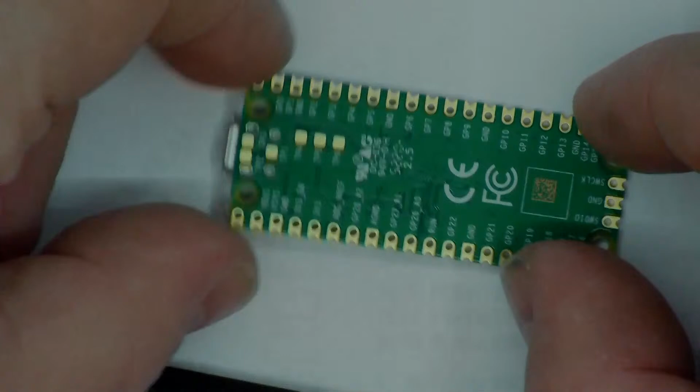Anyhow, we're going to go over the Raspberry Pi Pico today. Let me get that on an overhead cam for you. It's this little guy right here, and our job is to come up with a matching land pattern that will intercept all of these pads so that when we secure it down to our board, we've got something to solder it to, right?

That's what we're doing. Your part editor is going to be responsible for your pads, for your silk screen, for some invisible layers, and we should probably start with those. So let's go to a picture-in-picture view. All right, now I just have to stay on screen. So the first thing that we probably want to talk about, and I can just zoom out, let's do that, is what these various layers are.

One layer is quite obviously the copper. Some parts, especially through-hole parts, actually pass through your board. So you'll have another layer on the bottom. And each of these are copper layers. Everything that exists on top also exists on bottom, right? So I'm not going to draw all of the layers below, but the exact same thing happening on top of the board happens on the bottom of the board. It just passes through the mid layer.

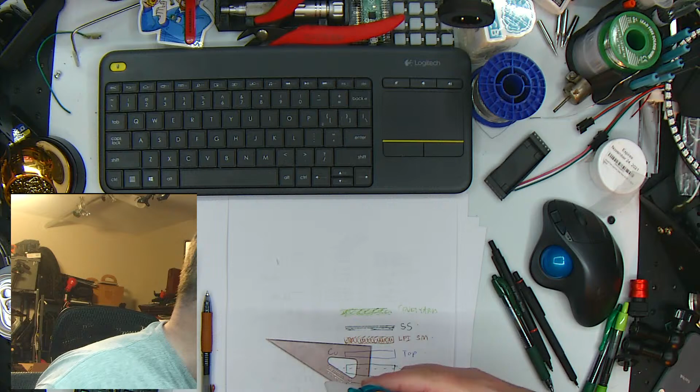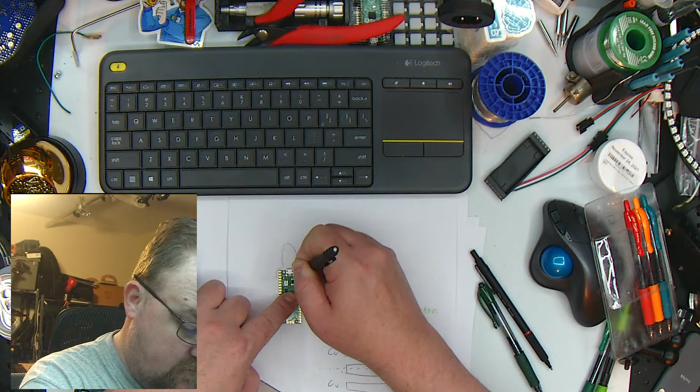When you have a part, for example, that Pico that I've already seemed to have lost. Wow, that was actually really impressive time-wise for me, to lose something that quick. Well, if you've got the Pico, you don't want to put other parts too near it. So the courtyard is just a contour that goes around your part so that you don't put other parts too close to it. So it's just a contour.

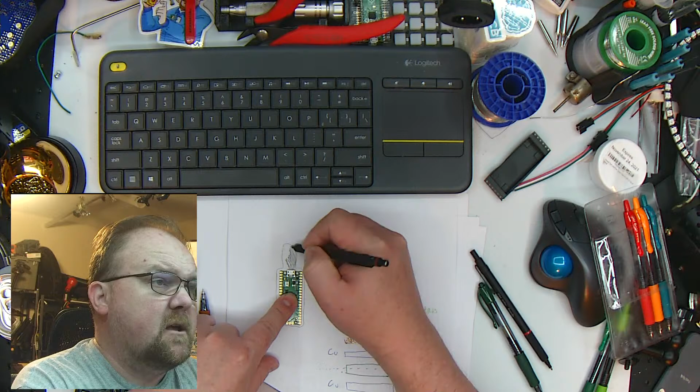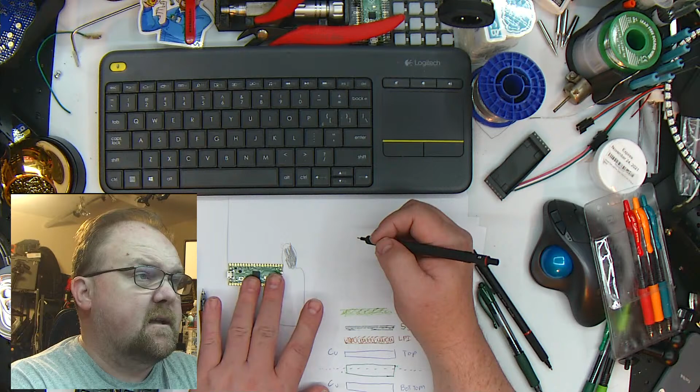And you'll notice I did a big area out here. You're going to need to be able to plug this thing in. And cables usually aren't all that bendy. So you need an area out in front. You might even need to put this thing at the edge of the board so that you can plug into it that way, because it's going to sit really close to the edge. Anyhow, that's your courtyard layer. Then on top of that, you've got an assembly layer.

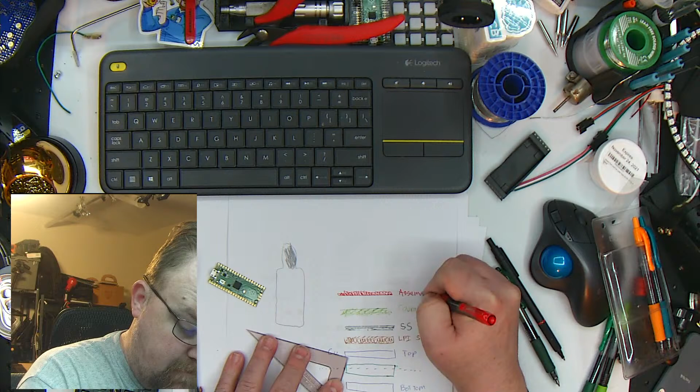Your assembly layer is going to be used by the fab house for the pick and place, for locating the center of the part, the centroid or the number 1 pin, depending, and helping to pick stuff up and place it where it needs to go. There's a few others too, and in fact I can bring them up for you.

I think I'm on screen almost. Oh yeah, I just need to change this. Give me a second here. And let's bring up DipTrace. There we go. Wrong screen. No! Yeah, that's going to make it mad. Let me close these. Sorry. I thought I had it ready to go, but when you're working off multiple screens, sometimes things just don't work the way you want them to. No, I don't want it on that screen. Yeah. Not ideal. DipTrace doesn't like moving from 4K to 1080p. Come on. There we go. No, come on. There we go. And it messes up this toolbar, which kind of makes it hard to see things.

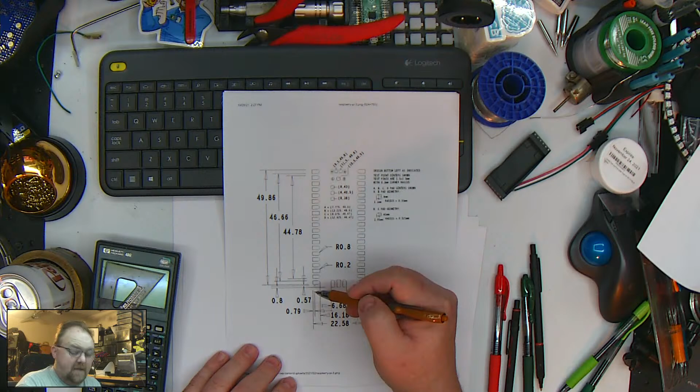46.66 is from the inside of the top pad to the inside of the bottom pad. So if we subtract those two numbers, what we'll have is the height of two pads. The probably best way to illustrate that, right when we subtract them, we're going to get the height of two pads. 46.66 to 44.78. So that's from the inside of pad 1 to the inside of pad 20. 44.78 is from the outside of pad 2 to the outside of pad 19. Clear as mud, isn't it? So that will give me the spacing between two pads.

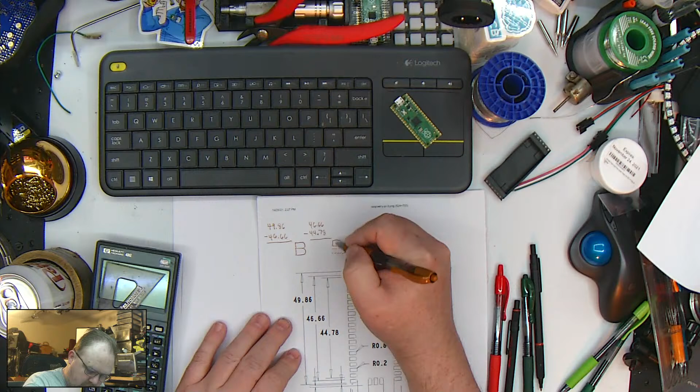All right, we're going to run those, even though we can very clearly do those in our head. 3.2 isn't hard to come up with. We're going to run them through the calculator just to make sure that we don't do something stupid in the subtraction process. So we've got 3.2 divided by 2. So I've got 1.6 for the width of one of these pads. As far as going on the other side, we're going to do the same thing.

46.66, 44.78, subtract them, divide by 2, and, oh, I guess I should write it down first, 1.88, divide by 2, so what we've got is a single pad plus the space to the next pad is 1.6 plus 0.94. So the distance that we need to go from pad to pad, the interpad distance then is 2.54 millimeters.

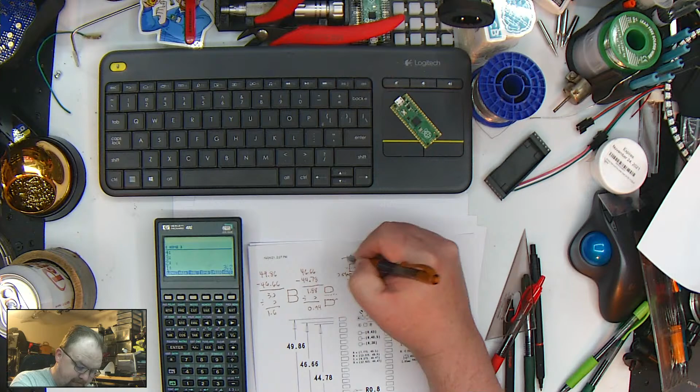Now, next up, we've got to figure out the width of these things. And for those, I need the 22.58 and the 16.18 measurements that are down at the bottom here. 22.58, 16.18. Subtract them, divide by 2, and we get a pad is 3.2 from end to end. All right, we are ready to type some things into our calculators there.

My standard pad is going to be D-shaped. It's got a width of, what did we say, 1.6. A height, or I'm sorry, let's do a width of 3.2, 1.6. And let's just kind of see what that ends up looking like. If we got it right, nope, I got it backwards. So let's back that off. I figured I did. I wasn't quite sure. Let's see what that looks like. That looks like the pad I was expecting.

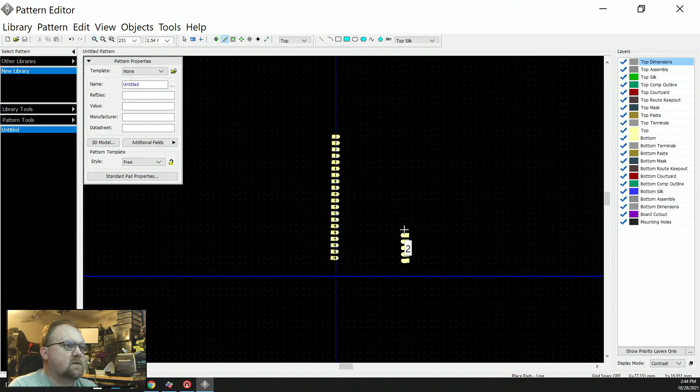Okay. Now, we're going to go and make an array of pads down one side and then up the other, and then we're going to set the spacing for them. That's great, except are there 20? I better double check. 3, 4. There are, in fact, 20. So down one side, up the other. Oh, I don't know if they're straight. They sure don't look straight.

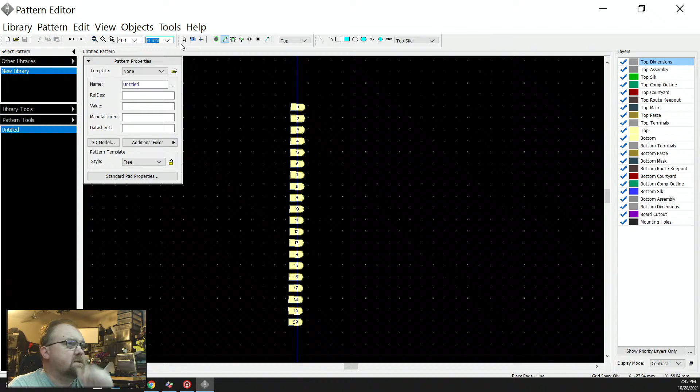Let's make sure we've got a grid snap on. That's what's wrong. So I'm going to snap to grid, and I've got my grid set at 2.54 millimeters. So these things are going to all pop out at 2.54 millimeters spacing distance, which is what we want. And then I will fix my origin and all of that in a minute. I just want to get these things down.

1, 2, 3, 4, 5, 6, 7, 8, 9, 10 through 20, 21 through 40. I'm not doing that arbitrarily. I am doing that based on the datasheet, the Pico module. So if we scroll down to, looks like I might have already made comments on it. Let's come back here. If it'll let me, will it? It won't. Okay.

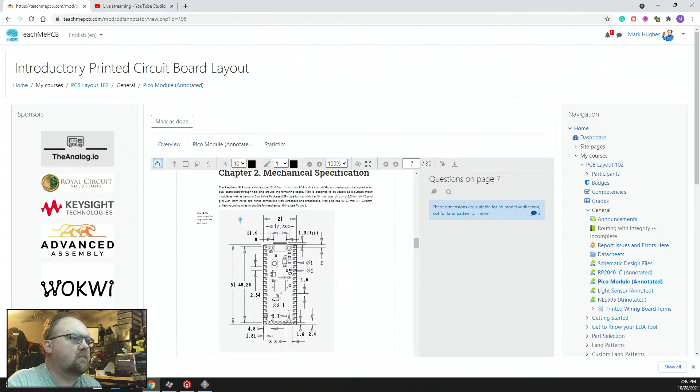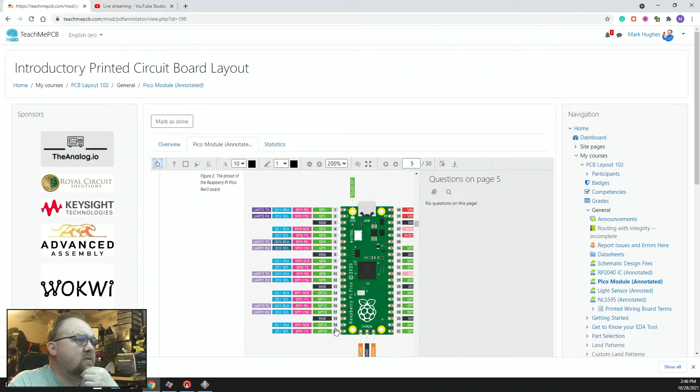I can't tell yet if those are, well, that gives it to us anyway. I just need to zoom in some more. Or maybe that's my max zoom. Okay, so it goes 1 through 20 down the bottom, 21 through 40 up the side. That is indeed what we want.

Now, spacing. If I go back to the image here, I either need 16.18 from inside to inside or 22.58 from outside to outside. So I'm going to pull up a dimension tool and capture inside to inside. Whoops. Okay, I need that to be 16.18. Right now it's 14.58.

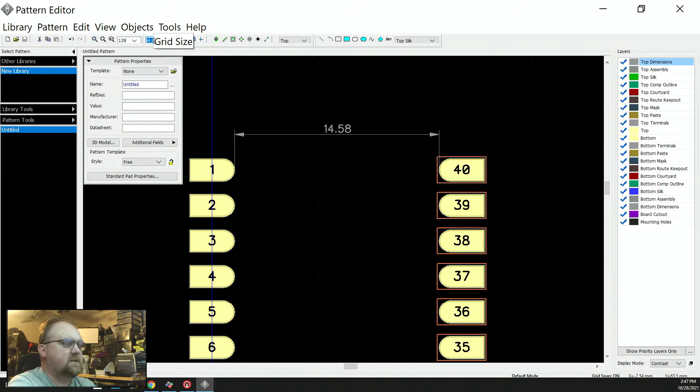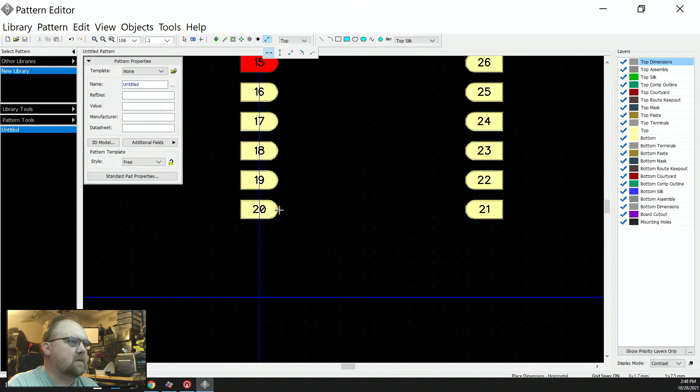And I don't have it. What I'm going to do then is set my grid nudge to 0.1. Grab all of those. Whoops, 16.18. So now these things are exactly where they need to be, right? I do want that dimension, but I'm going to move it down here where it's a little closer to what it looks like in the data sheet.

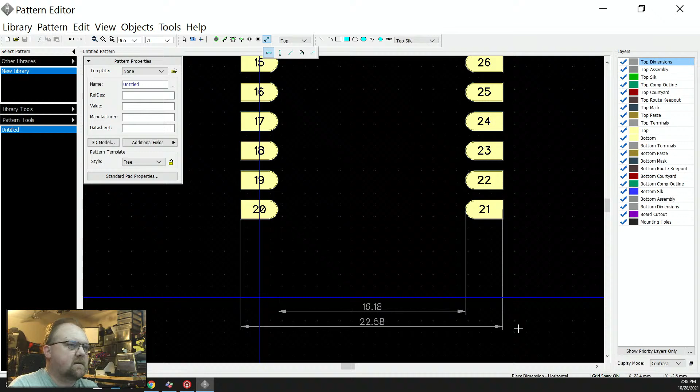Okay, and then 22.58. Whoop. Highlight, select. Okay, those are done. And while I'm at it, I'm going to add a couple vertical dimensions just to make sure that I got everything here correct. I can't tell if that's letting me highlight it or not. No, that's off. Will it let me do it? I thought DipTrace would do it.

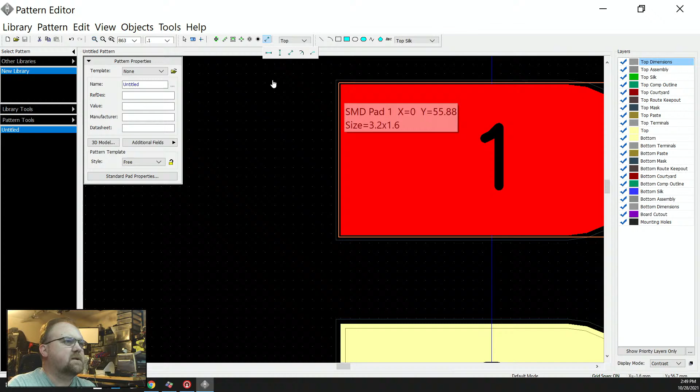Well, let's just try it. But I'm pretty sure it's grabbing grid coordinates instead of the part coordinates. Let's see what number we get. 49.9. It's supposed to be 49.86. How else can we do this? View. Well, tell you what, let's not worry about it right now. But I would like to come back in and add those additional dimensions just so that we can keep track of anything.

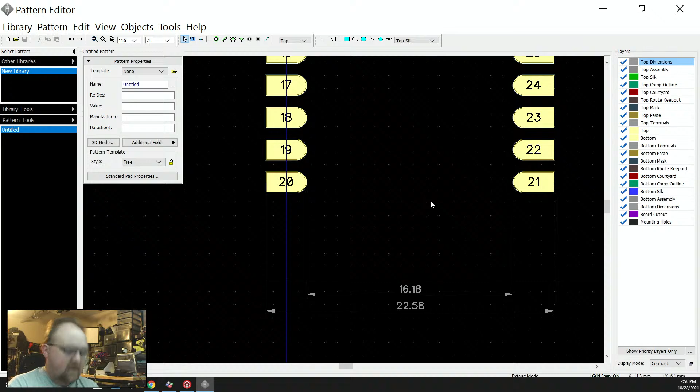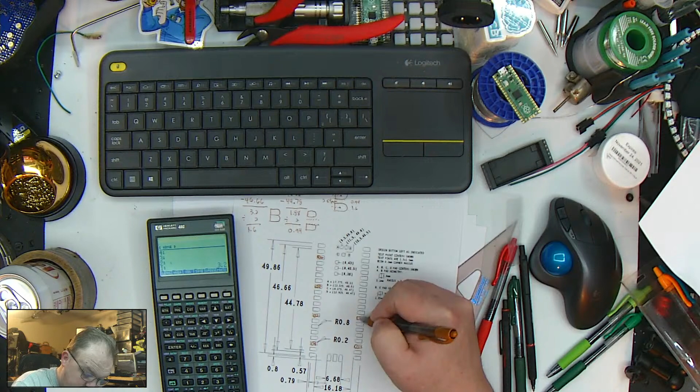Next, I've got to edit these radii. If we go back to the data sheet, ground, ground, ground, ground. Mirror image on the other side. So those are different pads. I'm going to go back and edit those to reflect that. And the way that I do that in DipTrace is I no longer use the standard pad properties. I'm going to do a rectangle with a rollover of 0.2.

I can't read that. I think that says 0.2. It's just mad because of what I did. Now the next question is, can I do multiple pads at once? Let's find out. We're going to turn that off. We're going to turn these to rectangle, and 12.5 gives me the specified rollover. Oh, I can. Okay. So then let's just grab the rest of them.

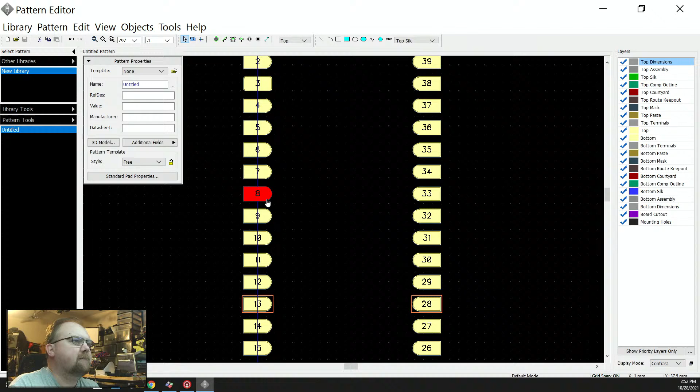I need 4, 5, 6, 7. I need pads 8, 9, 10, 11, 13, 18, 20, 23, 28, 33, 38. So grab 13 and 28, 8 and 33, and 38 is left to do. Width, height, all of that business, 12.5. Okay. We're looking good so far.

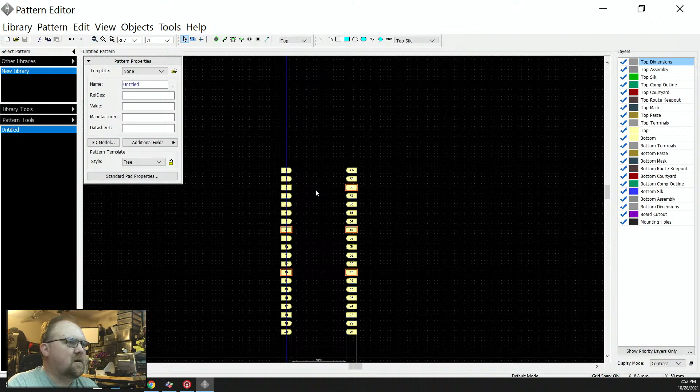So now the question is, what are we going to save this as? This is my library. This is going to be the Pico module. It'll be fine in there like that. We still have to get the pads up in here and the 3 pads down here. I'm going to do the lower ones first, despite the fact that I'm sure they're going to anger me. So these are going to be pads 41 through 43, and this is silly. So probably need to get in even closer for you.

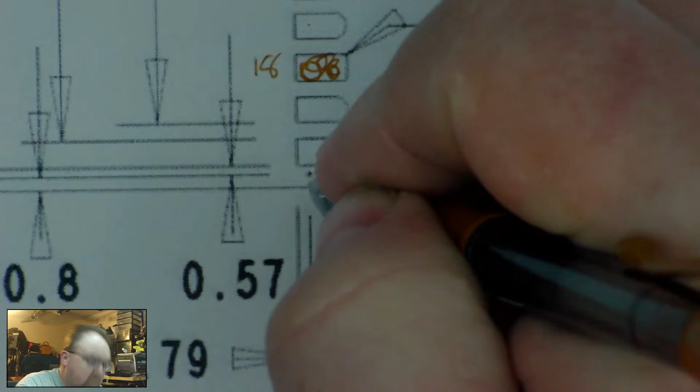So they've created a datum, a little point right there that things are measured against. From pad number 20, the bottom of pad number 20, that datum is 0.57 below that. And below that datum, another 0.8 is the bottom of these pads. So 0.8 plus 0.57, so we've got 1.37 is the bottom of this pad below the bottom of this pad.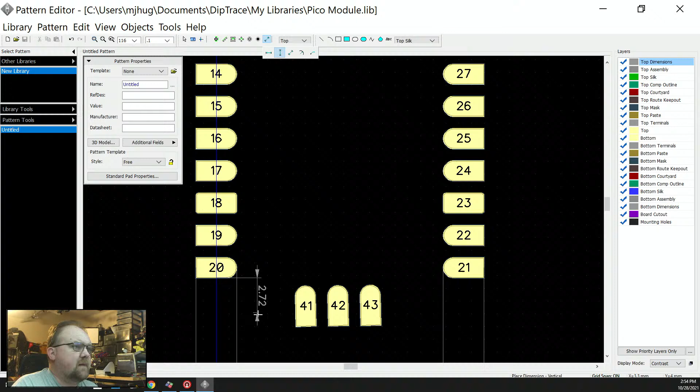Raspberry Pi Foundation, if you're watching, I don't like the way you did this data sheet. So we need to grab that. And we need to grab that. Oh, did it? And we are going to have to move these things so that they are 1.37.

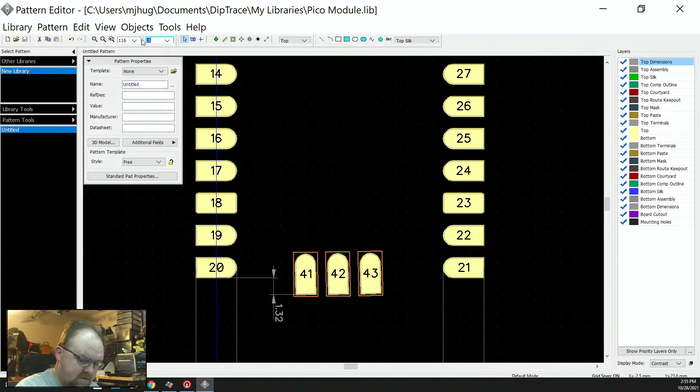Now my spacing isn't sufficient, so I'm going to drop that even more. Whoops. No, 0.05. Enter. Grab those three and move them down to there. All right, that gets me that.

But now I need these things to be 6.68 apart. I bet you they are already there, but we're going to measure them to find out. They sure are. And then 16.18 center to center. That does me no good. Oh, I already know that.

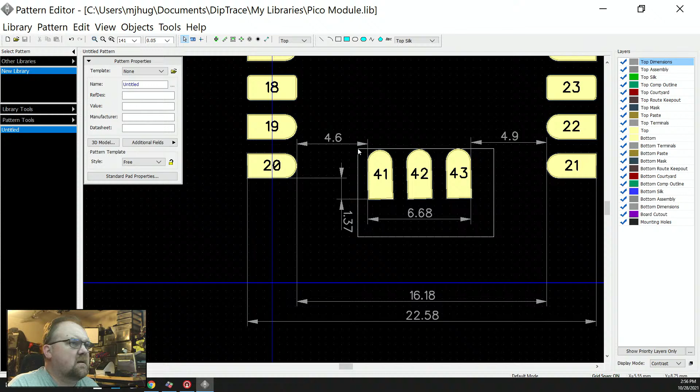I need these things to be centered with respect to each other here. Okay, so those are not centered. So we're going to grab those and they are now centered. All right.

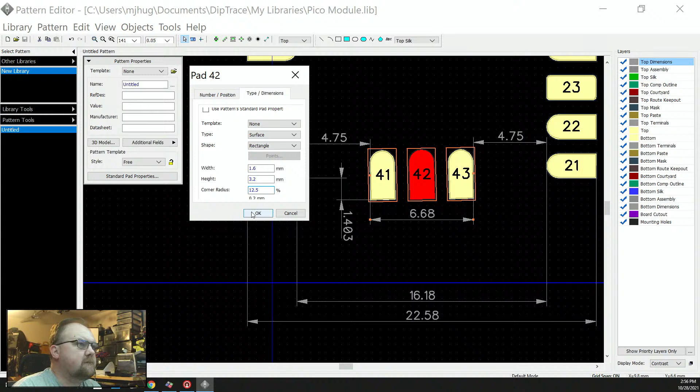This is one of my magic pads again. So give me a rectangle with 12.5 rollover. No. I had them all selected. My bad. Give me a rectangle with 12.5. Okay, now we're starting to look like something useful. Not a ginormous fan of the data sheet, but at least we are making forward progress.

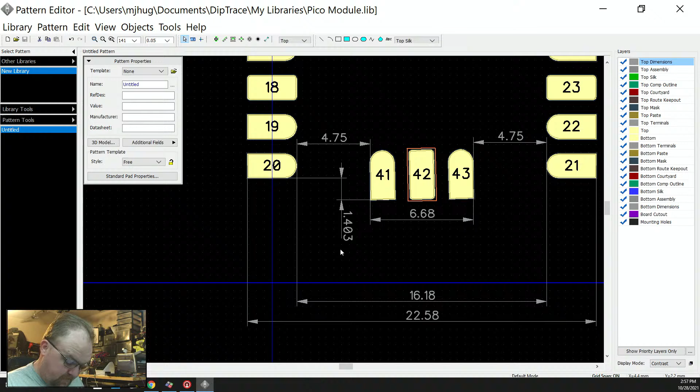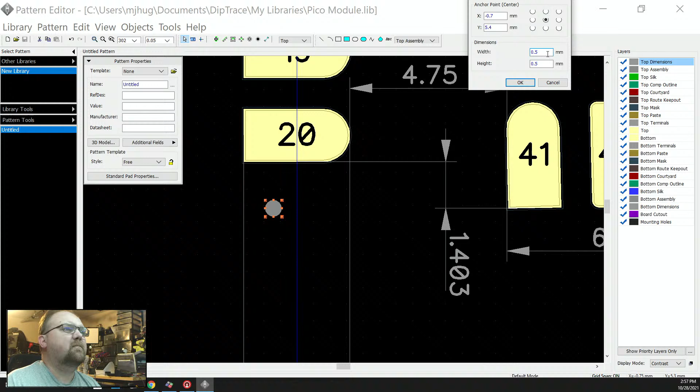Now, they created a datum right there. Let's put in a filled obround on the assembly, and then we'll locate it manually here in just a second and move our origin there. Yeah, I don't care about that. And we'll just make it 0.5 by 0.5. Yeah, that's fine. What matters is where it's located with respect to the left of that pad and to the bottom of that pad.

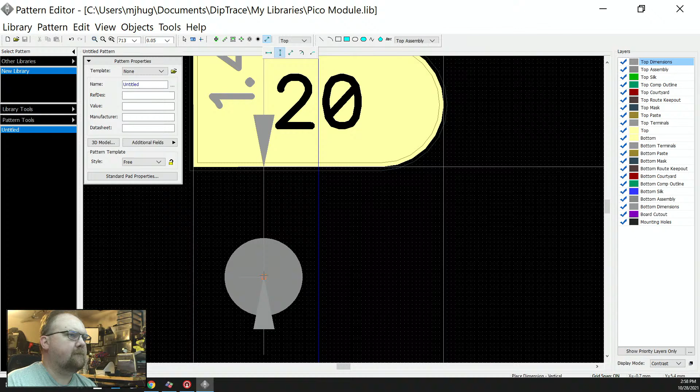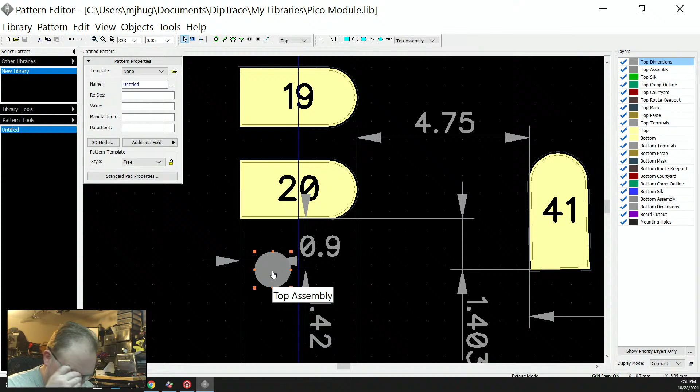I need the center of that. Is it not going to let me? There it goes. And then I need another from there to the center. Okay. We've got something. According to the data sheet, it needs to be 0.79 from the left edge. That's close, but not close enough. We'll get that in a second. And it needs to be 0.57 down.

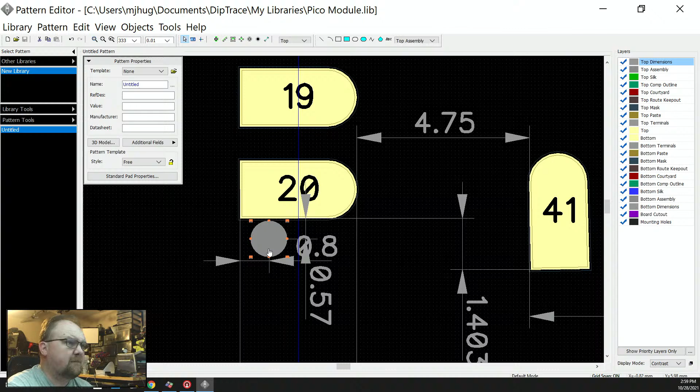So we're going to drop this down to 0.01. Give me a smaller nudge. There we go. So this is going to become the new 0, 0 on my design. Why that's the 0, 0, I couldn't tell you. But from that datum, they've laid out these last 3 pads. And these last 3 are the USB D+, D-, and ground.

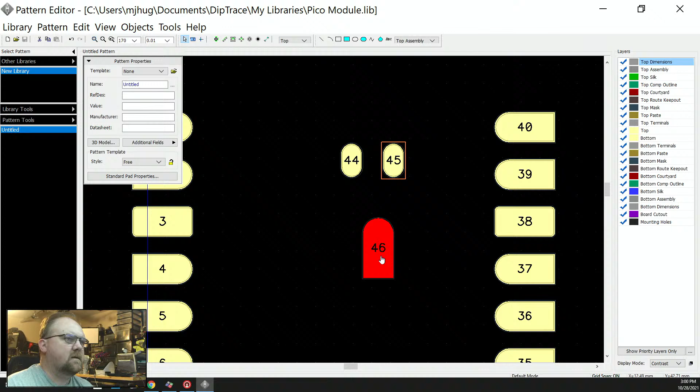They are not going to be that size. So the first thing, well, here, let me just turn off the, there we go, just so I can edit those without screwing up everything. And it gives in the dimensions that the top two are 1.8 tall and 1.1 wide. And they are obrounds. Well, except it needs to go the other way. And then it says radius of 0.55.

Let's get them both at once. Yeah, it looks pretty much the same to me, but whatever. And then finally, 1.45 by 1.05. Why they're so different, I couldn't tell you. And radius 0.525. Oh, but that's not a percentage, is it? Whoops. There we go.

Now, as far as location goes, the datasheet is actually kind enough to locate these for us. So the 9.5, 49.8, 11.5, 49.8, and 10.5, 46.5, we're just going to put those right in because they're referenced from that datum that we created a little bit ago. So I just go over and start typing in. 9.5, 49.8. 11.5, 49.8. And finally, 10.5, 46.5.

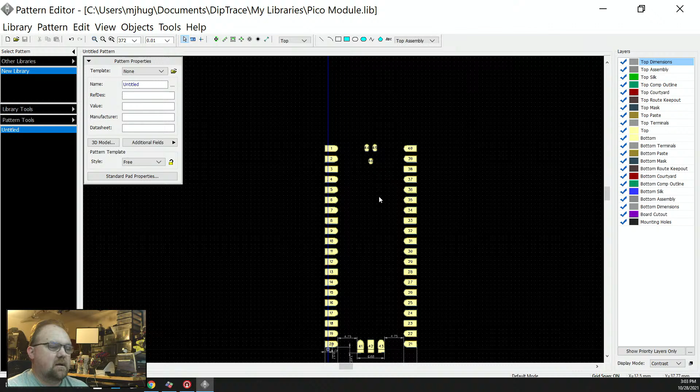Okay, those are located. There's only one issue. This is the surface mount design. If you guys were going to put this down in a reflow oven, this is just fine. But if you're not using a reflow oven, you need a way to get in there and apply solder and heat those spots. That's tough to do. So instead of leaving those the way they are, I'm actually going to change those from what's recommended and make those through-hole parts. They can be obround, I don't really care. But what we need to do is put a hole in the middle.

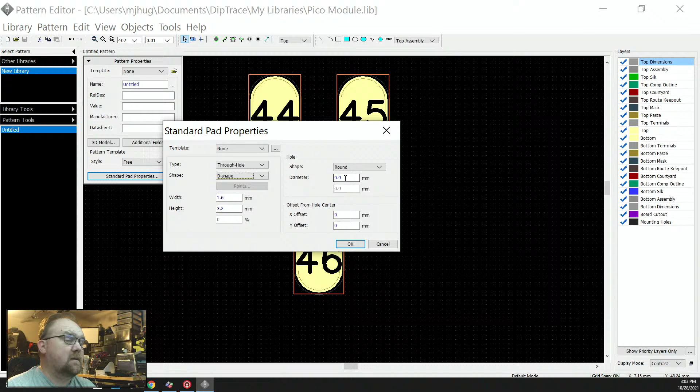Through-hole part, yeah, let's just see what that looks like. There we go. So now we've got some holes in the middle. The only thing is that these things don't have very large annular rings. The copper around the edges there isn't that big, and that can cause some errors. So what we're going to do here is grab those, and see if we can shrink those holes. Those are pretty big diameter holes. I could take those down to 20s. So if we do 20, let's call that 60 and 60. Let's see what that looks like.

And we need to know the spacing between those two and make sure that is not going to throw an error. So I've got 20 mils between them. That should theoretically work. It's not going to be the prettiest joint ever, but it'll hold. There's space in the middle, there's an annular ring that's big enough. The space between them is big enough. So that should theoretically work.

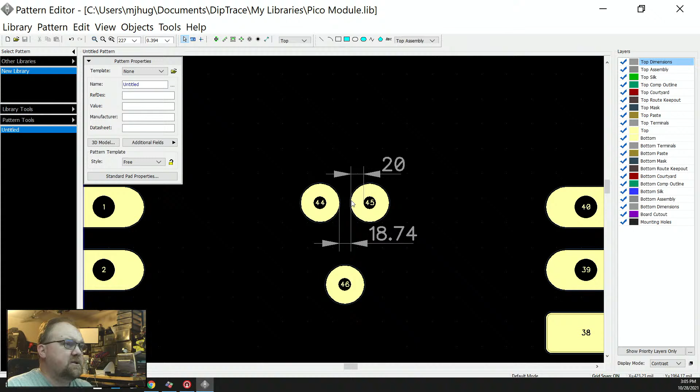I'll leave those off. Now, we're not done. Let's go to a reasonable... yeah, 25 mils should be fine. A reasonable grid size, and let's put out our courtyard. This is going to be our keep out area.

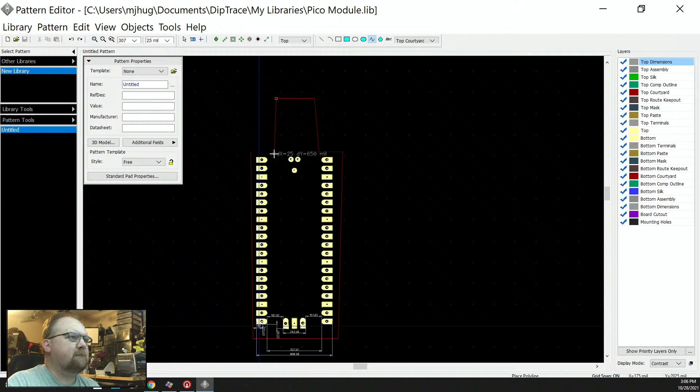And these can be relocated after. You can move them around a little. I just kind of want to get the basic idea down. I want to give a decent space around the top there. Whoops, haha. What can I say?

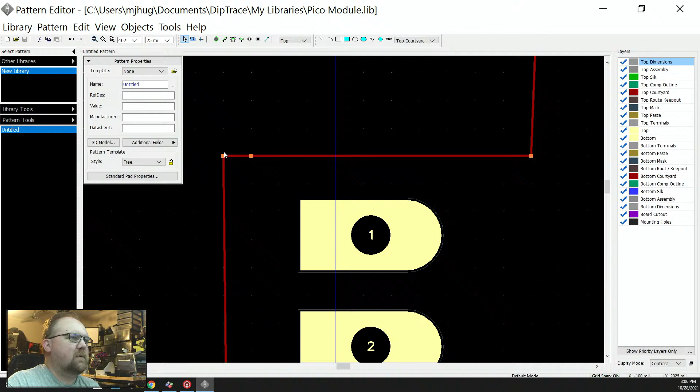So just bring that one down. I couldn't bring the other one up, and then that side's too high too, and it's at an angle, and blah blah blah. But all of that is adjustable.

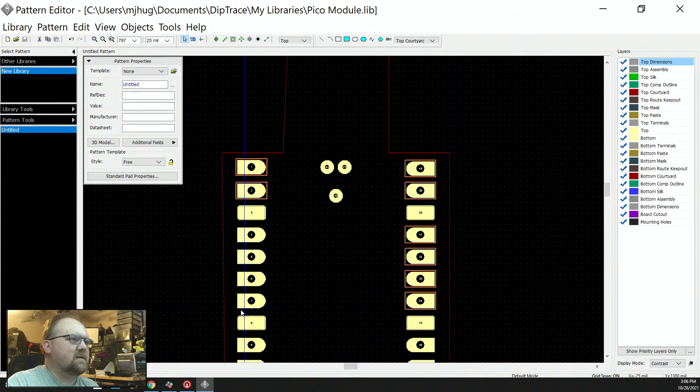Oh, and if you look, I messed up these. I turned them all into vias when I was playing around with the others. So I've got to click on all of these and make them surface mount again. Whoops. I tell you, I just can't have nice things, can I? Keep breaking them.

It's the only problem with using standard pad properties in DipTrace, is it's very easy to mess things up when you don't mean to. Surface D-shape. There we go. That fixes it. Okay.

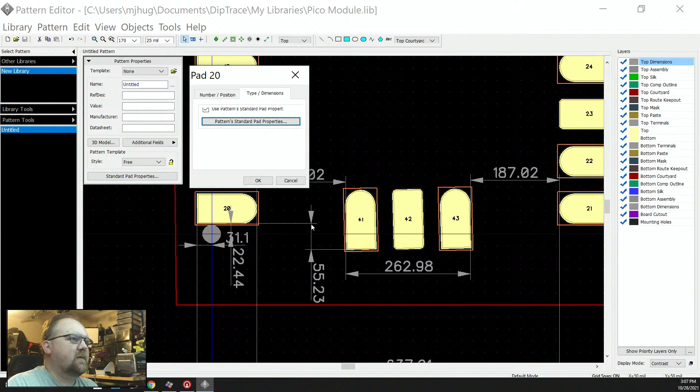Now, you also should get in the habit of putting a pin 1 indicator. And that can be a circle or a triangle. So I'm going to put one in my assembly layer. That won't show up on your board at all. And then I'm also going to put one on my silk. That will show up on your board. It's right now hiding underneath the assembly layer, but it's there.

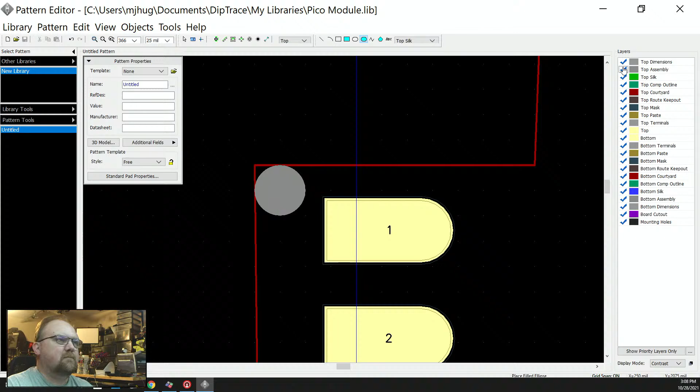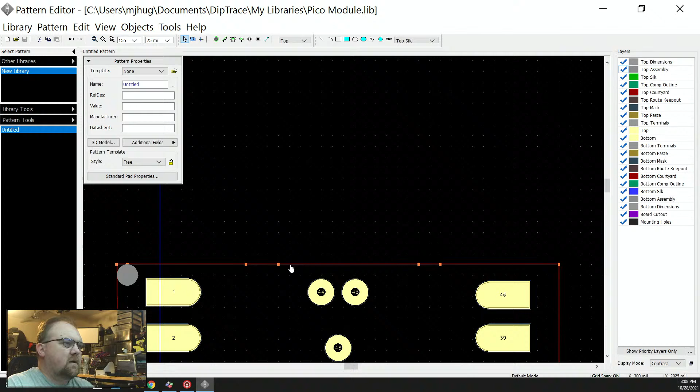Right? And then you can add other information if you want. You don't have to, but you certainly can. One thing you might consider doing is, instead of doing this big offset thing that I did here, you could indicate that this needs to be placed next to the board edge. I'm going to delete points here.

Just because anywhere you put it on the board, it is going to end up really close to the board. That could be problematic later on if your off-board USB doesn't work. So I'm just going to get that party started. And then we will label that board edge.

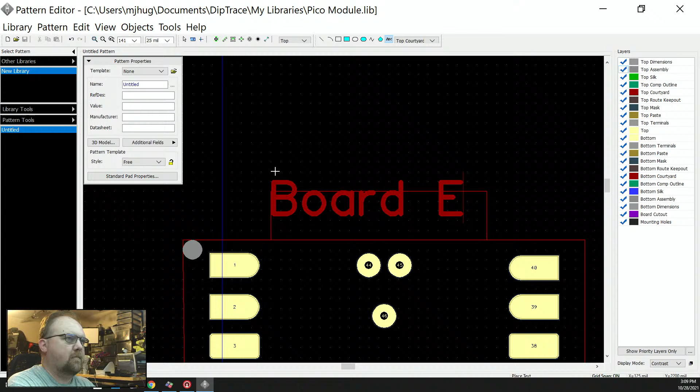No, come on. Don't be that way. What's going on, DipTrace? There we go. It took it that time. Yeah.

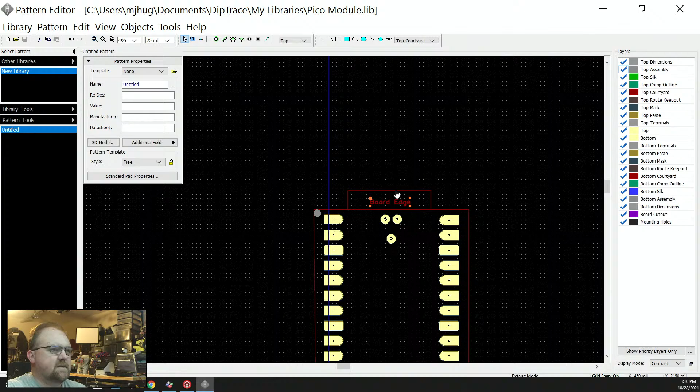Courtyard, anchor point, font settings. This will never print, so I can go to any size and it'll be fine. But this reminds me that when I place this, that needs to go towards the board edge so I can always plug in my USB.

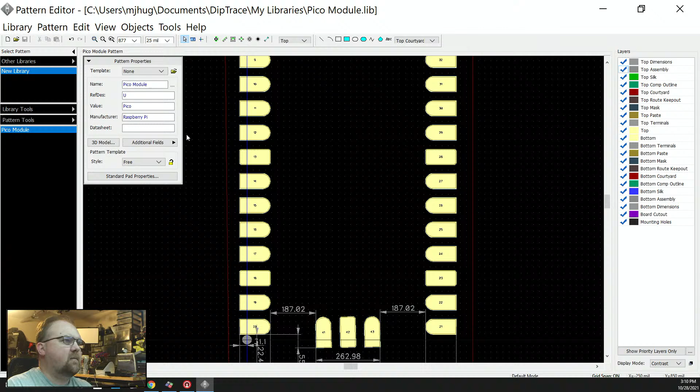All right, so let's save that as the Pico. Module ref des is going to be U whatever. Okay, and then we can save that. Now, we're not done. We need a 3D model. Oh no, don't be this way. It's going to be completely off screen. Am I not going to be able to show you how to add that?

Oh, come on. Oh no. Okay, let me bring this down to the other window and see if I can get that opened up and then move it back. I don't know if I can. It is off screen on this one too. Well, foo! Okay. Do I have any other tricks up my sleeve? Can I edit 3D model from here? Nope, still off screen. Well, phooey phooey. Yeah, it's way off screen.

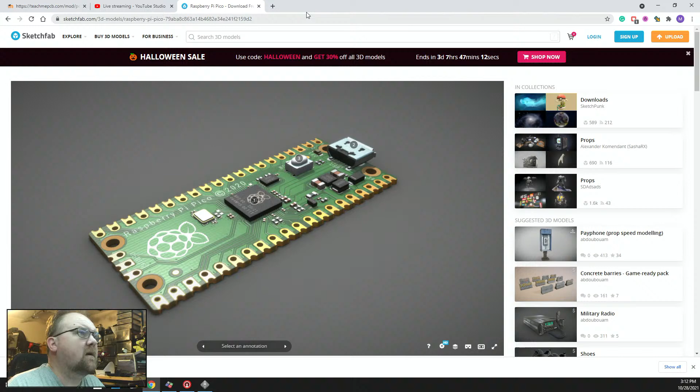Let's try that. Select an annotation. How about save? Is save an annotation? There's also one, the Raspberry Pi Foundation has one too. So there's no need to pay for any of this.

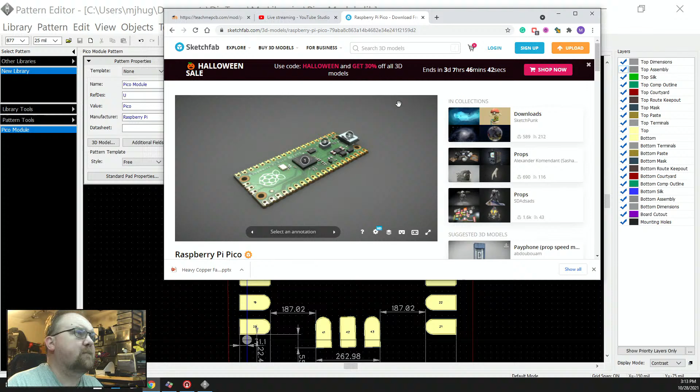I just don't see a download. Maybe I have to log in or something. But anyways, there's plenty of versions of this thing around, and you can actually take them and import them into your 3D program or into your EDA program and compare, which I can't do because all of the important buttons are way off screen, but you can actually compare the pattern that you just made to the 3D model and see if everything lines up. If it does, you're golden, you're good to go. If it doesn't, you have to figure out, is the 3D model bad or is what you did bad?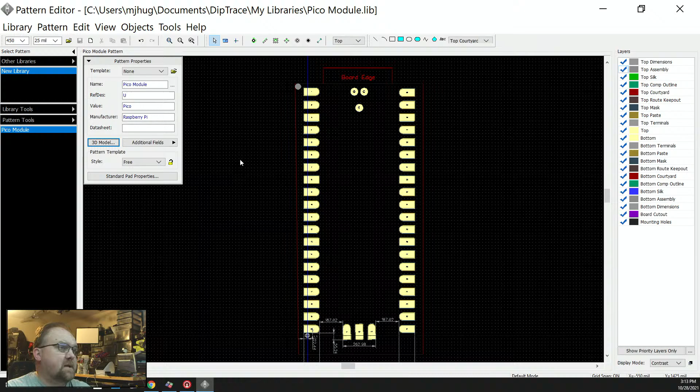So anyhow, that was unpleasant. I don't know. Let me turn off my picture-in-picture here.

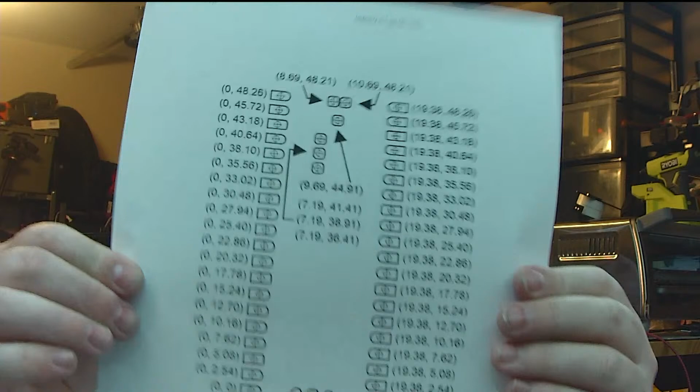Now, what I did do for you, because I am not a big fan of this, right? That does not spark joy. So I went through and I indexed everything off the pin number 20 there so that you can have a little bit of a better time figuring out where parts are. And that will be part of the resources that are available to you when you lay out your patterns next week.

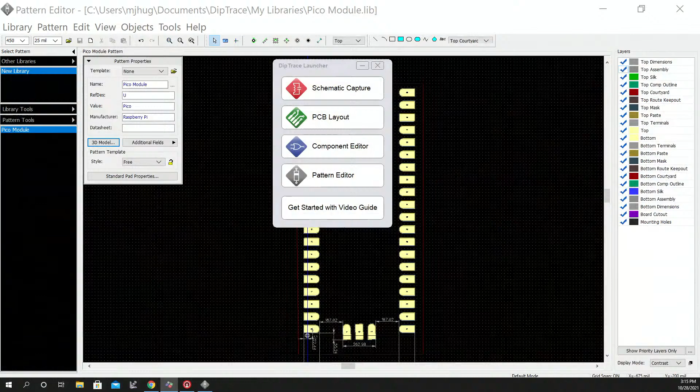Now, that's not the only thing you have to do. If you did that for every part that you have, it would be a long week. Personally, that is what I do. I've been burned far too many times importing other people's models. But it is possible to grab those things from places like SnapEDA. So let me take a quick moment and show you how to do that. Hopefully it'll be on screen.

No, it's off screen. Don't be that way. The only other thing we can do is I wonder if we can close it and reopen it. In the wrong screen. I wonder if we can project. I wonder if I just change the resolution. Yeah, duplicate. I want it to be duplicated. But it's not duplicated, it's extended. Something's wrong. Oh, this is frustrating. What else can I do? Oh, here we go. All right. So, it's not ideal, but I can kind of make it work.

So you type in the part that you're looking for. You do have to create an account, which I'm not going to do right now. But you can absolutely download whatever part that you're looking for, right? If a pattern exists, absolutely go ahead and download it into your program. And also grab the 3D model if they have it and link it to it. Anyhow, once you get those, I guess I should go back so you can see me again. You still need to use the dimension tools to figure out if the part is accurate. It might not be. But that can save you a ton of time when you create your library.